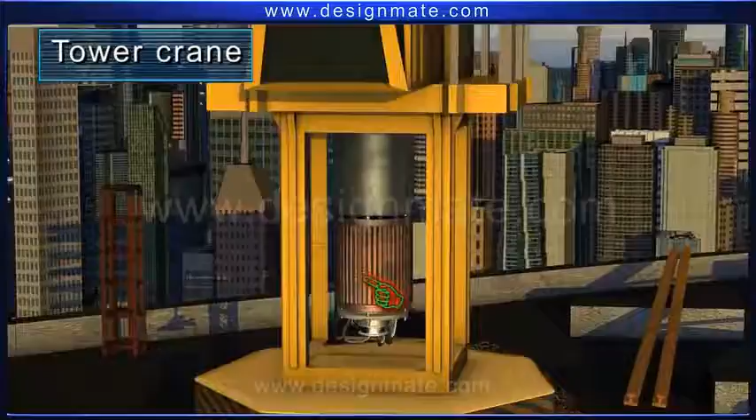Did you know the secret behind the mind-boggling speed of TGVs, one of the fastest trains in the world? It's the use of electric motors. Not only in the transport sector, electric motors find their application in areas as diverse as household appliances, commercial complexes, devices used for lifting and moving objects, and even in toys.

Motors powered by direct current are referred to as DC motors. A simple DC motor consists of a rectangular loop P, Q, R, S, made of insulated copper wire.

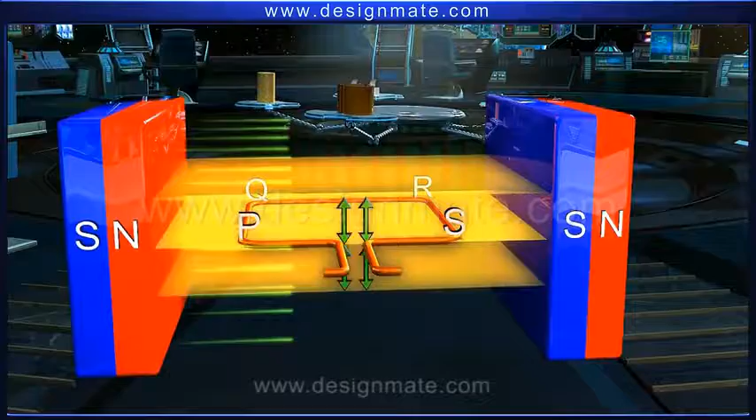This loop is placed between two magnets such that the plane of the loop is parallel to the direction of the magnetic field. The ends of the loop are attached to the two halves X and Y of a split ring commutator. These halves of the split ring are insulated from each other and are mounted on an axle about which the rotation is to take place.

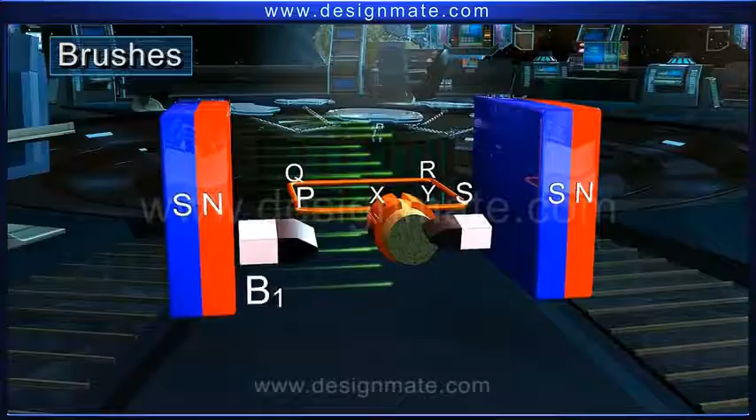Externally, two conducting stationary brushes, B1 and B2, keep pressing against X and Y respectively. These brushes are connected to a DC source. Let us now understand how this assembly works.

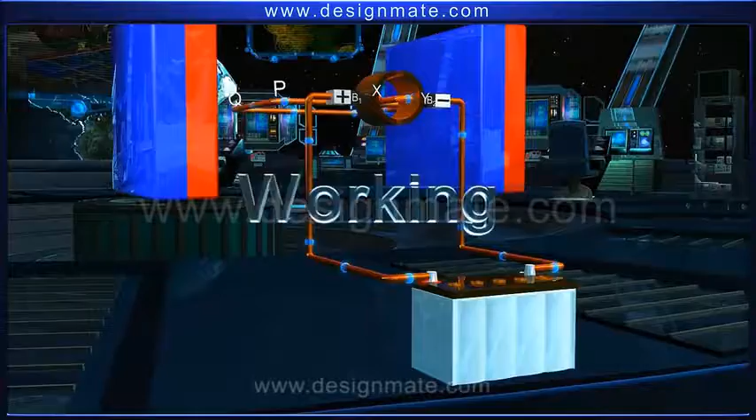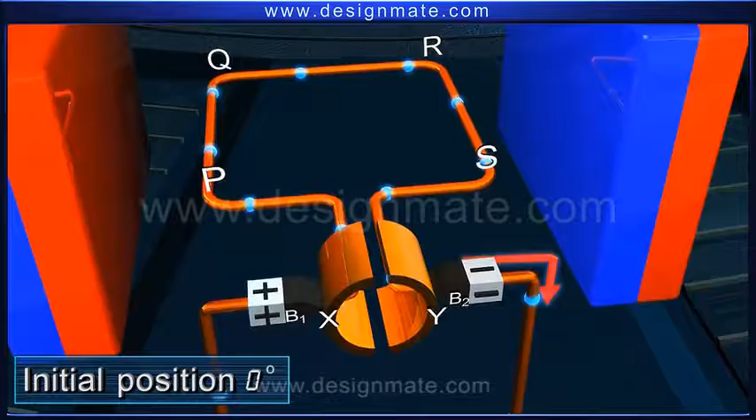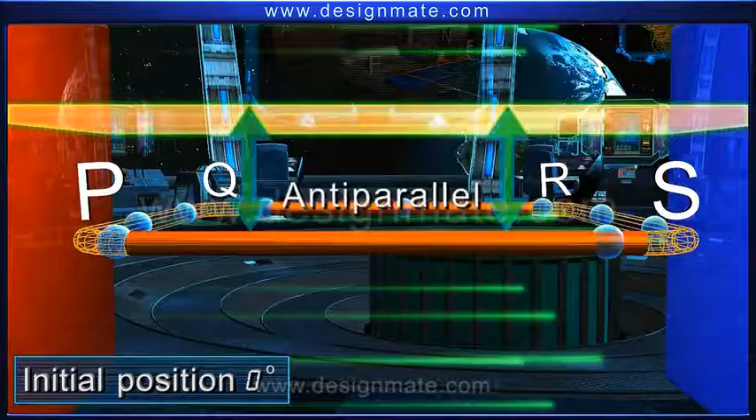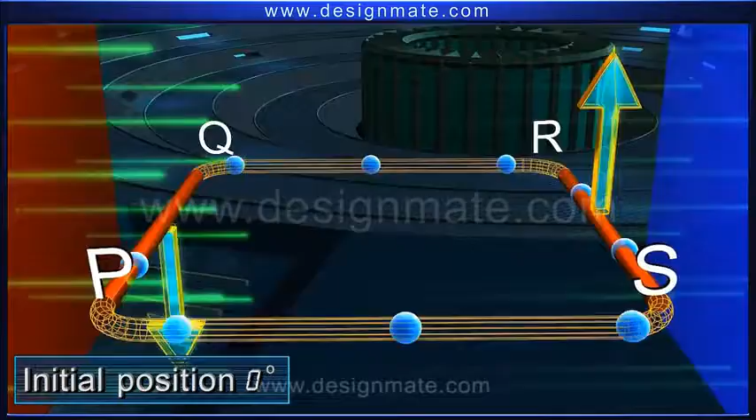Let the current from the battery enter through brush B1, flow through loop P, Q, R, S, and leave through brush B2. The arms QR and SP do not experience any force, as they are either parallel or anti-parallel to the magnetic field. But the arms PQ and RS, which are perpendicular to the magnetic field, experience a force each. The direction of this force can be determined using Fleming's left-hand rule.

According to this rule, if the first finger points in the direction of the magnetic field and the second finger points in the direction of the current in the conductor, then the thumb points in the direction of the force exerted on the conductor.

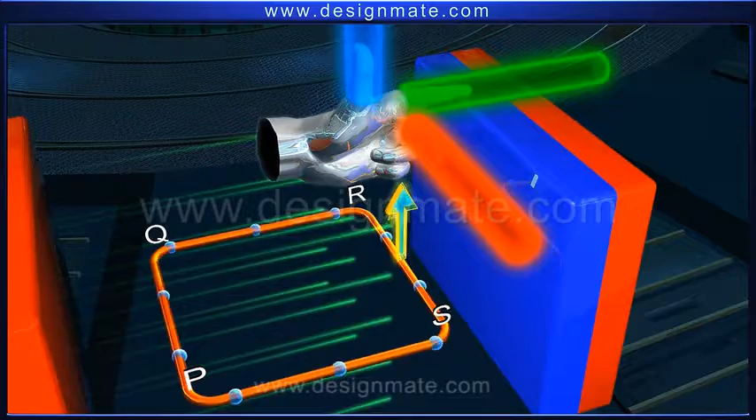Applying this rule on arm RS, we find that the force acting on it pushes it upward. Now we move on to arm PQ to find the direction of the force acting on it. Here we notice that the first finger points in the direction of the magnetic field, but the second finger does not point in the direction of current.

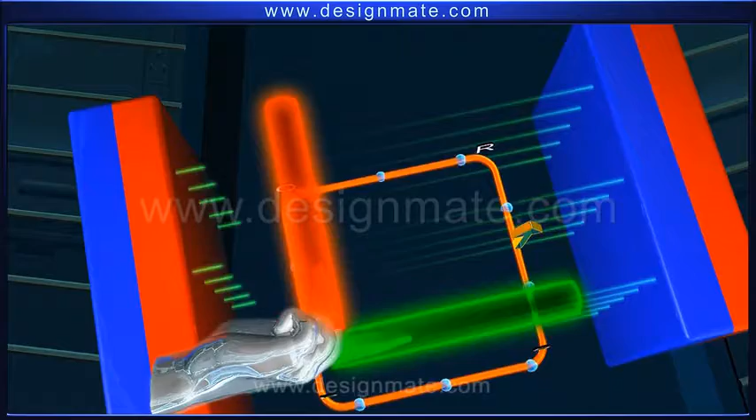So we rotate the left hand such that the second finger points in the direction of current. Notice that in this case, the thumb points downwards. This implies that the force acting on arm PQ pushes it downwards.

Thus, under the action of these two forces acting on arms PQ and RS having different lines of action, the loop starts rotating anti-clockwise. Just as the rotation starts, arms QR and SP are no more parallel to the magnetic field, and hence are acted upon by forces as well.

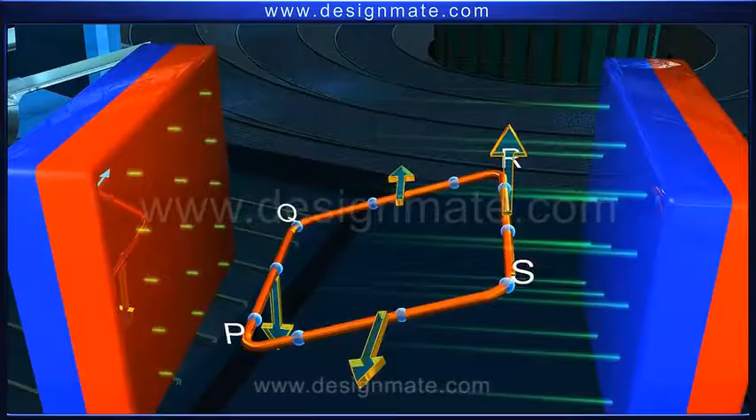But as the two forces are equal and opposite, and have the same line of action, they always cancel each other. Once the loop has rotated through 90 degrees, brushes B1 and B2 lose contact with the split ring and the current in the loop is cut off.

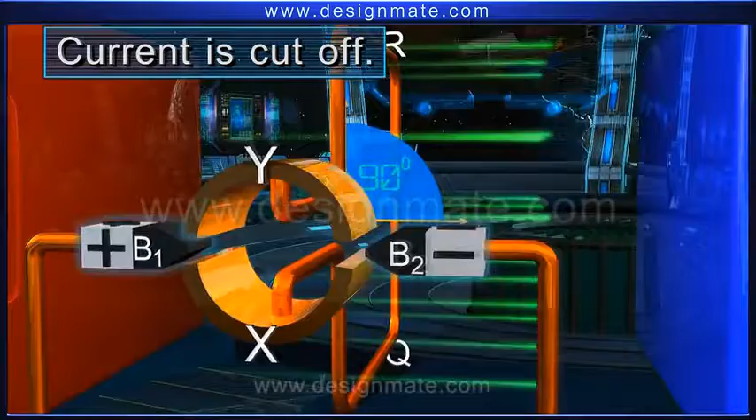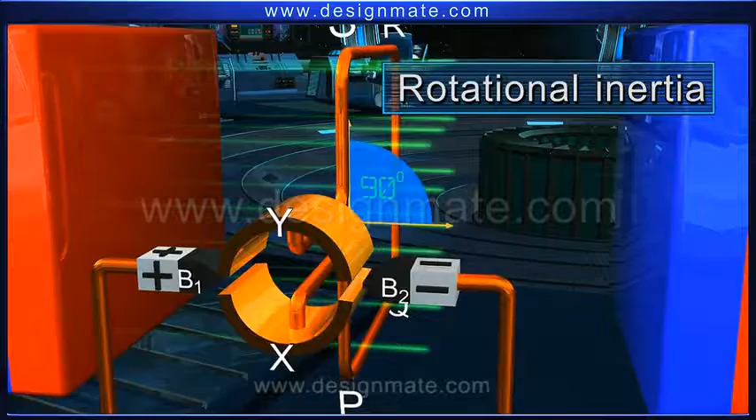In the absence of current, arms PQ and RS do not experience any force. This implies that the loop should not rotate anymore. However, due to rotational inertia, the loop continues to rotate a little further so that the contact is re-established. Just as that happens, the current starts flowing in the loop once again, and the loop continues to rotate in the same anti-clockwise direction.

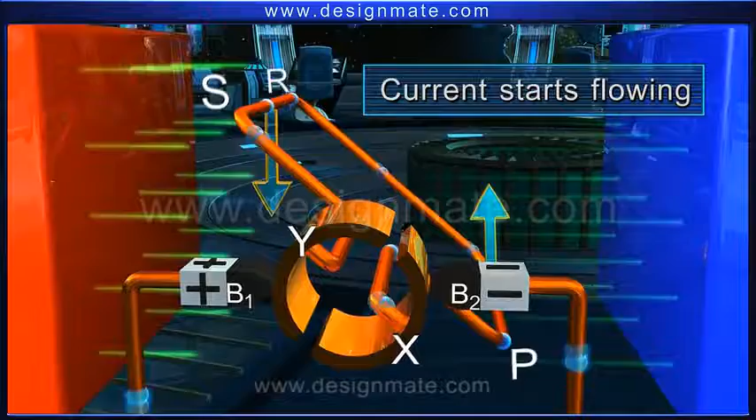On rotating through 180 degrees, that is, after half rotation, arms PQ and RS of the loop get interchanged. Now the split ring Y is in contact with brush B1 and X with brush B2. Therefore, the direction of current flow in arm PQ gets reversed.

This happens in arm RS as well. The reversal of current also reverses the direction of forces acting on them. Thus, arm PQ of the loop, which was earlier experiencing a downward force, now experiences an upward force. Likewise, RS experiences a downward force. As a result, the loop continues to rotate anti-clockwise.

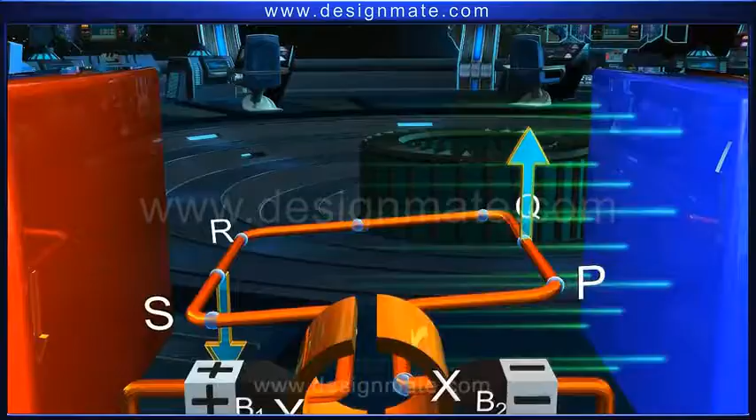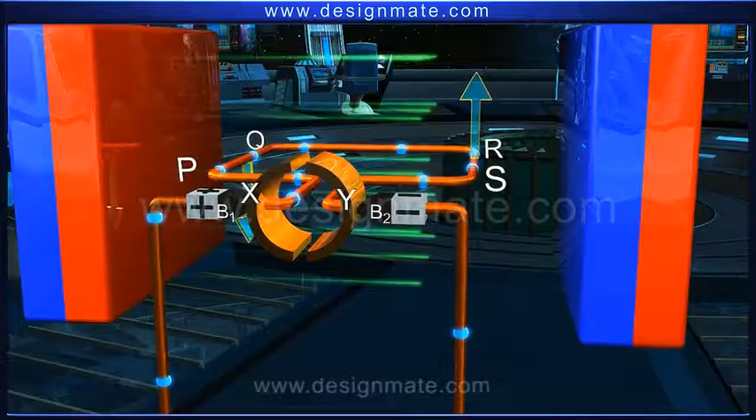Again, when the loop has turned through an angle of 270 degrees, the brushes and the split ring lose contact, but due to rotational inertia, the loop continues to rotate a little further so that the contact is established once again. As soon as that happens, the current starts flowing, and due to the forces on arms PQ and RS, the loop continues to rotate until it completes one full rotation of 360 degrees. This whole process is repeated a large number of times so as to obtain continuous rotation of the loop.

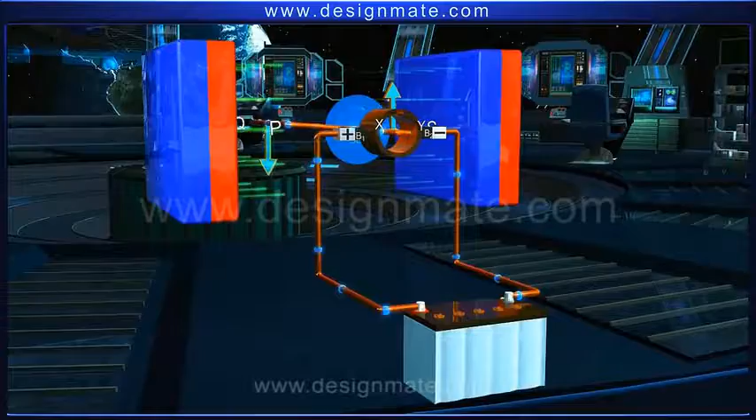Rotational speed of the motor depends upon several factors. Notice how on increasing the number of turns of the coil, the rotational speed increases. On increasing the area of the coil, the speed further picks up. If the current is increased, the rotational speed mounts up further. Finally, if we increase the strength of the magnetic field also, the rotational speed will touch a new high.

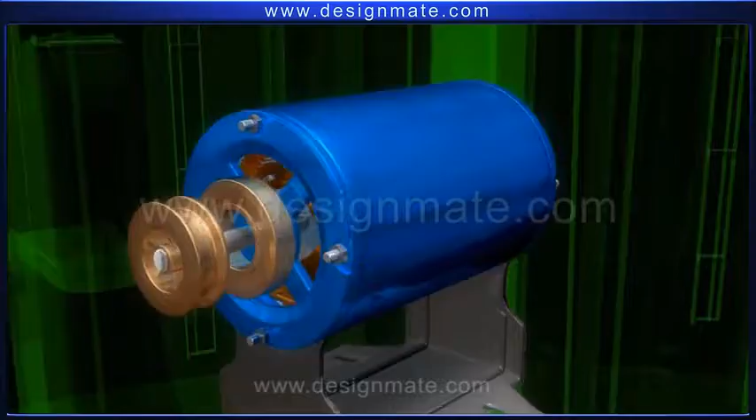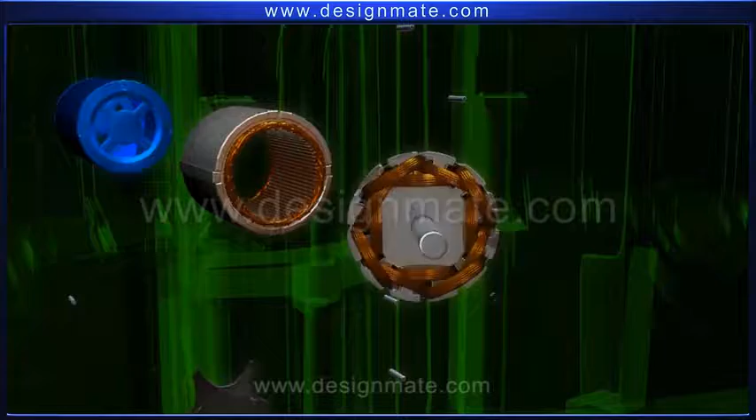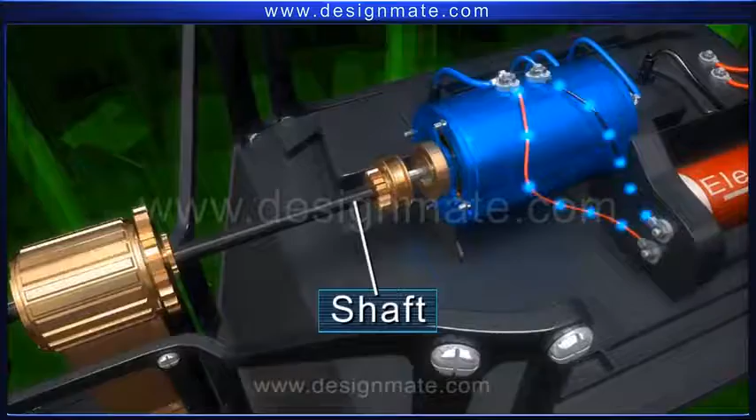In order to achieve high power, a practical DC motor uses an armature coil consisting of a number of coils mounted on a soft iron core. This armature is located between two or more electromagnets. On passing current through its coils, the armature starts rotating. The rotating armature turns the shaft to which it is attached. Thus, the electrical energy supplied by the source gets converted into mechanical energy.

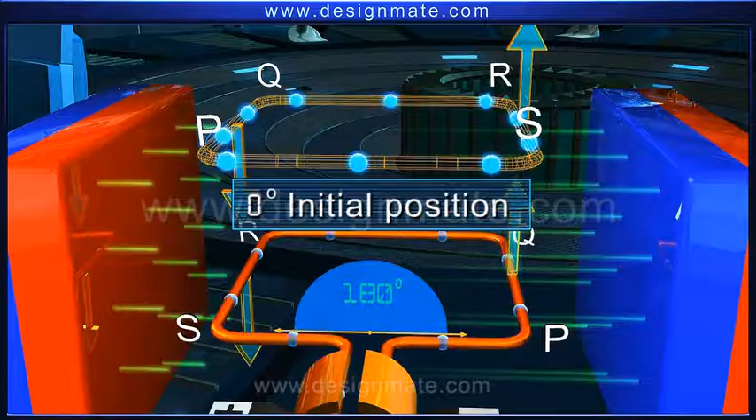Motors powered by direct current are referred to as DC motors. On passing current through the loop, there is reversal of current after every half rotation, giving rise to continuous rotation of the loop in the same direction.